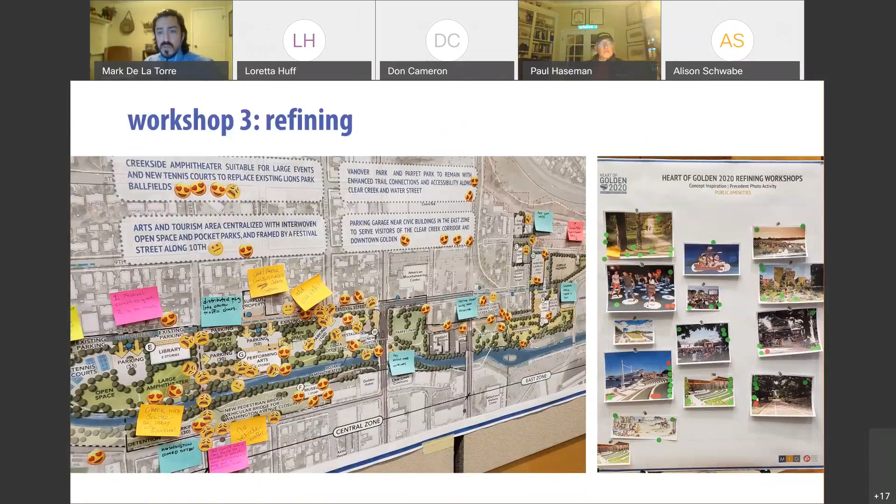Moving into next year, we had an in-person event, but we know that one single event on a given night of the week isn't going to capture everyone's input. So we replicated all those activities and hosted them online for a long period of time and got a lot more comments. We built off of those conversations and findings from the in-person event and continued that online presence for a series of weeks and months moving forward.

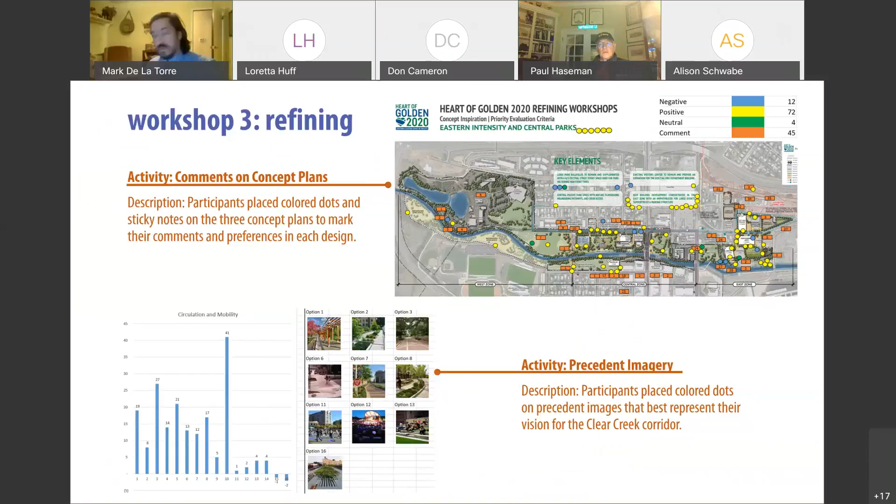From that, we moved forward with refining the input we received into a preferred conceptual direction. I'm not saying all the elements of this particular concept are the ones that rose to the top, but this generally had the elements that really resonated with the community at large.

In short, if we look at what those preferred elements were, it was really about trying to push a lot of that development intensity to the east and trying to preserve as much open space in the central core as possible. You can see a couple of zones here out east, and you can see the central and the west. That's going to be a consistent theme.

We've had a lot of great engagement events throughout the past year, some in person, some online, surveys, small groups, digital activities, all sorts of things, with a lot of different touch points with the community. But by and large, across the board, we're hearing consistent themes, which is always exciting. It makes the job easier. We're pointing in the right direction with not just civic needs, but also the community's aspirations.

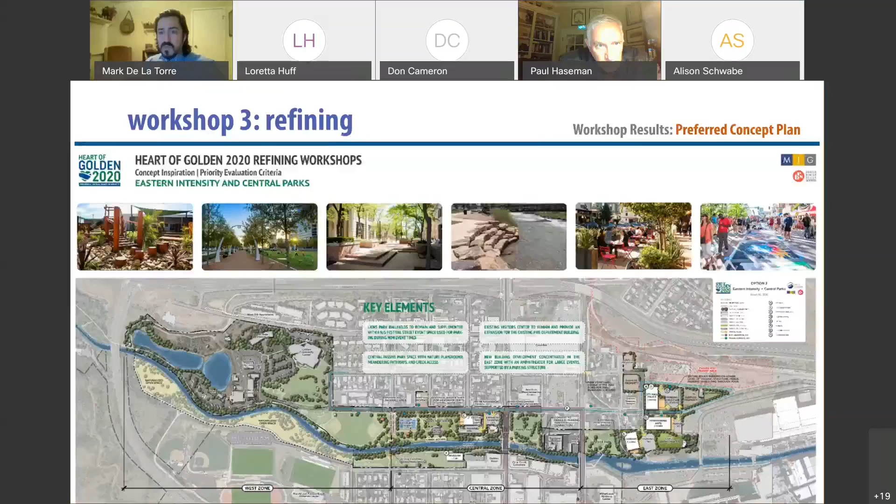With the thought of consolidating density about the east end and opening up the central space, some of the precedent images that really resonated with the community involved large open spaces, amphitheaters, passive walkways, and places to intimately gather in large groups. We want to make sure the character of these spaces really carried forward as we moved into refining what those concepts might be. So those conceptual elements are key themes.

Another one, actually more recently, we hosted a walking tour in kind of late September, early October. I say that generally because honestly, months and dates are a bit of a blur for me right now with two little ones at home.

But we had a great walking tour. There were four stations along the Clear Creek corridor at the Coors property up to the northeast and all the way down to the Illinois Street Ped Bridge. At those different stations we had informational boards, activities, and great conversations with numerous residents across Golden. That helped reaffirm some of the things we'd been hearing, but in a way that I think let us interact with more people that we hadn't seen in traditional formats like small stakeholder groups, large community meetings, or even an online platform.

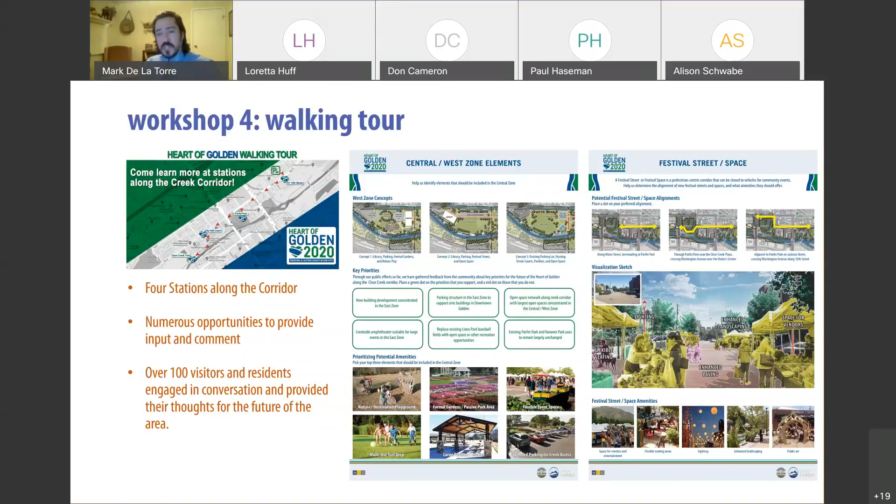So that walking tour, we took the information from there. At this point, I've mentioned a number of different strategies we deployed to try and get a general consensus, and we have data points across the board. For the sake of y'all's sanity, we won't share all those data points — it's a really, really big Excel table that we're pulling all this information together on.

But a way of building upon that is giving y'all a bit more ownership over the process. We know that as professionals, we can get into the weeds of like, oh, this building definitely belongs over on the east end and this one over here, and this is the rhyme and reason to that. But y'all know your city better than we do.

So we used some of the direction we had heard from y'all to date and started with a design-your-own-corridor piece. This was building off of the walking tour and all the engagement points we had to date, to add another touch point with the community that was unique and different from how we'd been asking questions before. Through that process, we started with some of those base concepts that originated in putting the buildings out east and giving us central space in the middle, and we took a couple of different flavors of that to start with.

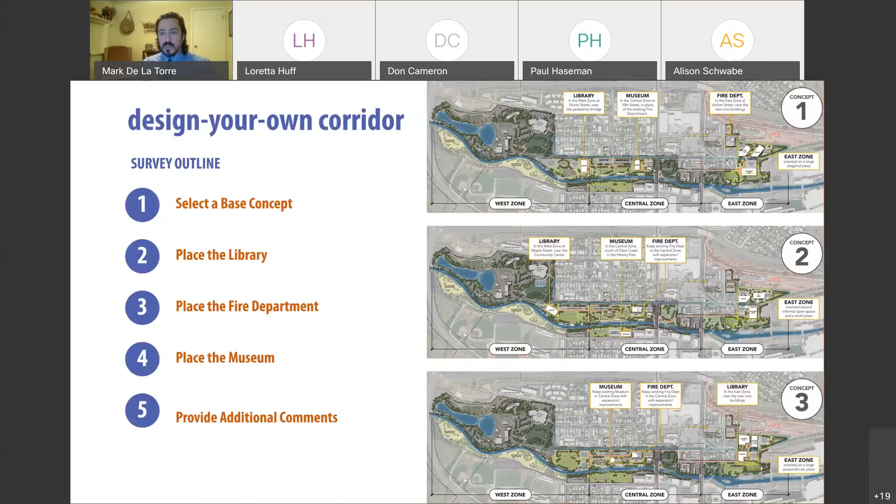Through a choose-your-own-path activity looking at key elements of the library, fire department, and museum, participants were able to build their own Clear Creek corridor concept. If you put a library in the location of the existing fire department, clearly the fire department can't go there anymore. We looked at about 45 different options of where buildings and elements could be placed.

Through that process we came to very similar conclusions, which is great. We're asking the same question in a bunch of different ways and getting more nuanced answers about using the east zone to anchor the library, possibly fire and museum as well, maybe looking at different locations for the museum across the creek.

As you went through the activity, by the end you'd populate your own illustrative plan or concept for the area. In this particular one, the one that rose to the top of all 45 different scenarios, it didn't notably score higher, but it showed the central space largely open, with the museum moved across the creek and fire down on the east end.

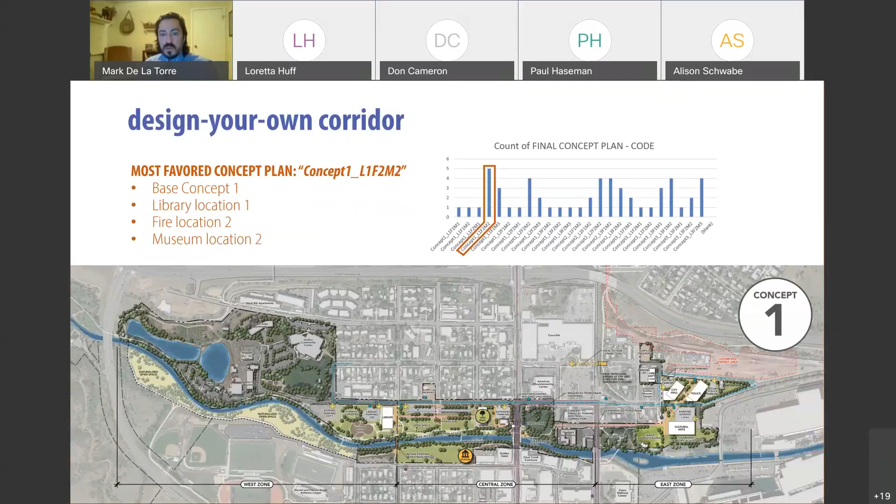That's not saying this is the definite direction moving forward, or that we're basing all our decisions off of this. But we're hearing some consistent themes about pushing things out east and figuring out how to open up that central space to respond to community needs around open space and passive uses.

Some of the larger themes touched on so far: open space is key to the central part of the Clear Creek corridor, and civic buildings and adjacent uses should be located to the east end of the larger zone we're looking at. The library is one area where we got a bit of mixed feedback.

There was pretty consistent direction for some program elements, like an amphitheater or fire department, but the library's position could go multiple ways—it could stay in its current location, join its civic buddies out east, or do a number of things. That one was a unique case, and as we move forward you'll see we still have diverging directions to consider.

Some comments during that time were really exciting—things we heard early on were integrated and carried forward with additional support, whether it was the amphitheater or using density on the east end to provide parking tied to a shuttle that relieves pressure and congestion in the central and west zones. There were consistent things that came up from community comment and anecdotally from those first community meetings.

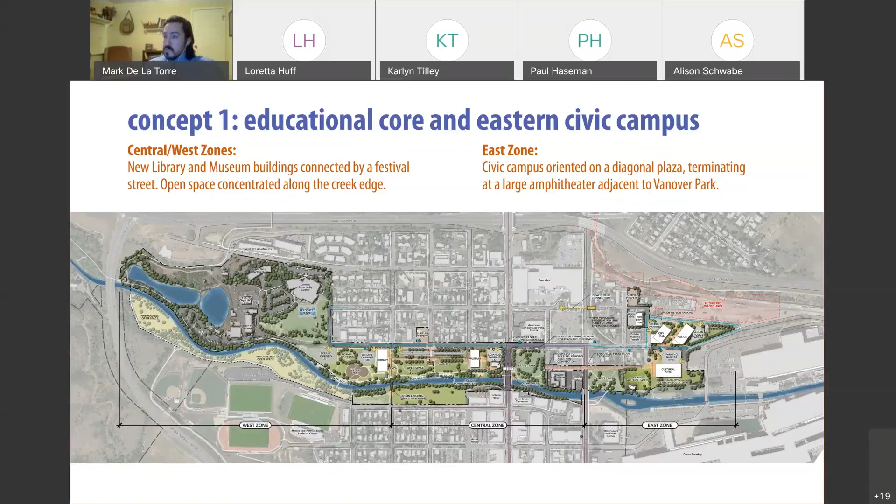The first is using that central space to highlight two culturally oriented facilities: an expanded library, Jeffco's library system there, and a museum. Those two culturally oriented community-type uses would act as bookends, from a building standpoint, to a central space that would be largely open. Across the board, this is a massive net increase in the amount of open space being provided, regardless of keeping buildings in this central space right here.

We have a consolidated and more intentional parking strategy. By pulling out some of those uses, you can see that central space -- and this is again looking at the Illinois pedestrian bridge, and back here, this little guy, is our existing visitor center.

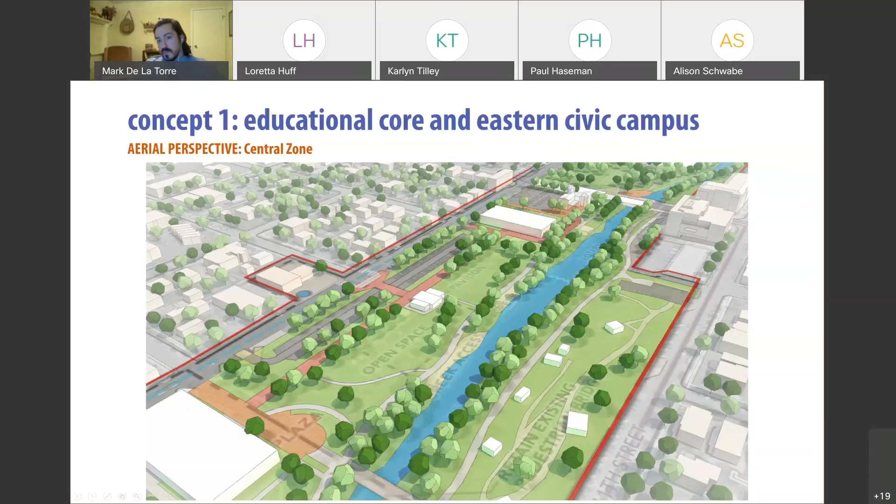When we look at the relationship that the central zone has to the west in this particular piece -- and again, I want to reiterate, I mentioned it earlier, but it's important to note that while these conceptual packages put together a conceptual design we believe is viable, it's not saying that any one of these is the right solution, either-or, one over the other. We're really focused on those elements and how they work together. I want to make sure that through this part of the process we're getting to a pause point, with some work ahead of us in the winter and early spring.

We want to make sure that all those elements still mesh well when we hopefully get to a preferred concept come next spring and summer.

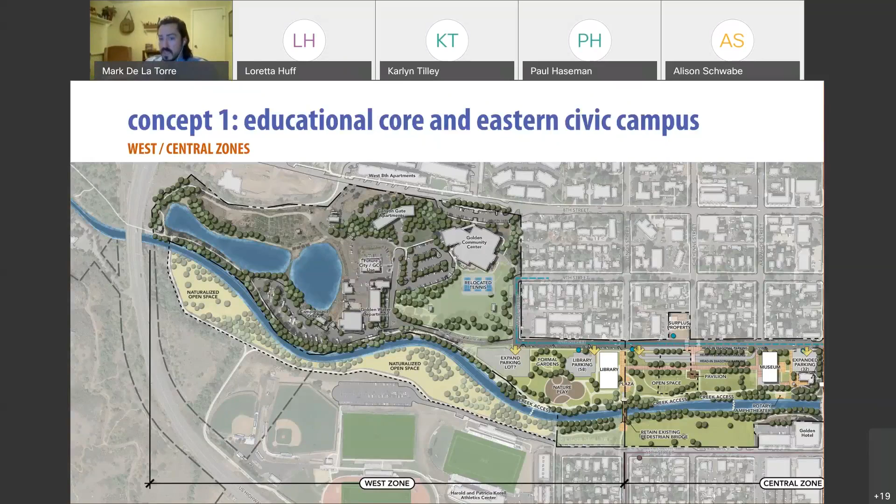On the west end here, though, you can see relocated tennis courts, the inclusion of some new program elements that we heard from the community: formal gardens, nature play, a pavilion, or more of a formal landing plaza for that Illinois Ped Bridge that has a relationship with the library itself.

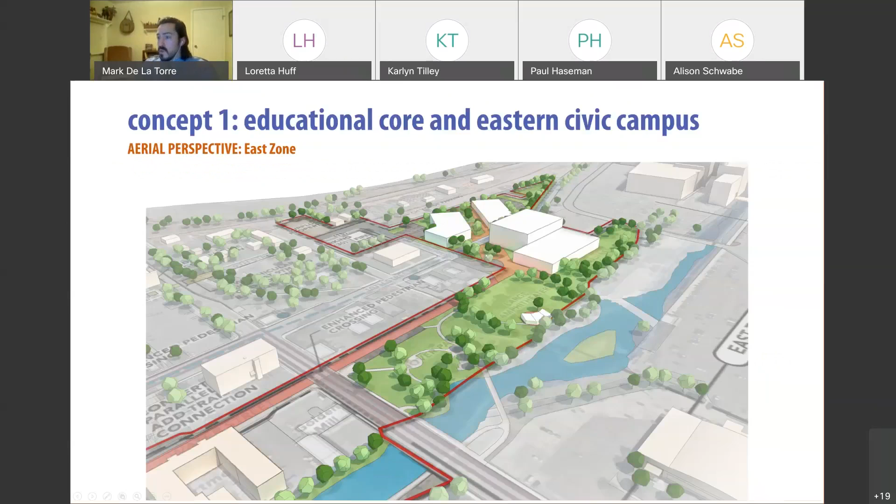Looking over to the east end, you can see that Vanover Park is now flanked by a larger amphitheater, which is on axis with kind of a view corridor that looks up to Table Mountain, with some larger civic facilities over where the Coors office building used to be located.

That orientation here, from planners speak, y'all probably heard it as well, we typically refer to as plan north in this instance. We've oriented the map more so as what we call golden north, just so we can lay things out pretty intentionally on a screen. But this axis right here, it looks like it's coming out at an angle—that's our true north angle, looking straight up to Table Mountain there.

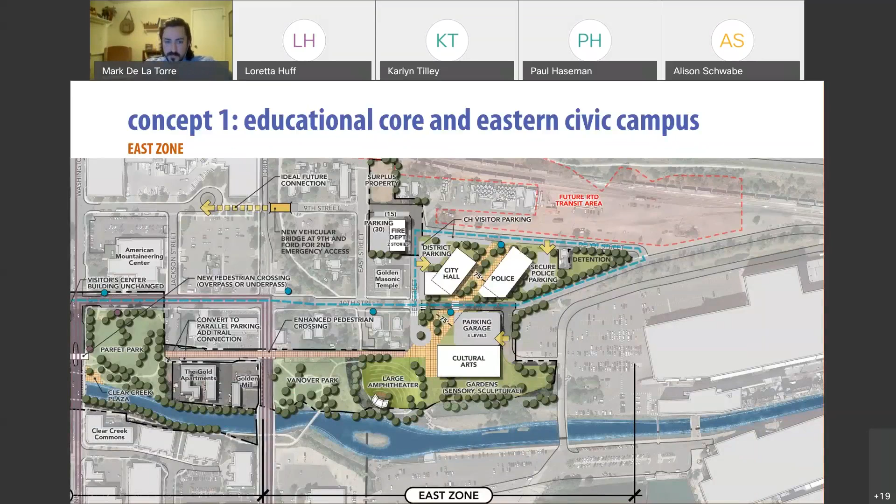The other conceptual packaging of those elements, based on the themes that we heard from the group and the community at large, is: okay, that's a good step, we like some of those cultural elements in that central zone. Library, yeah sure, it's already there. Museum, makes sense—you've moved some of those pieces out. But what if you gave us the whole corridor for just open space?

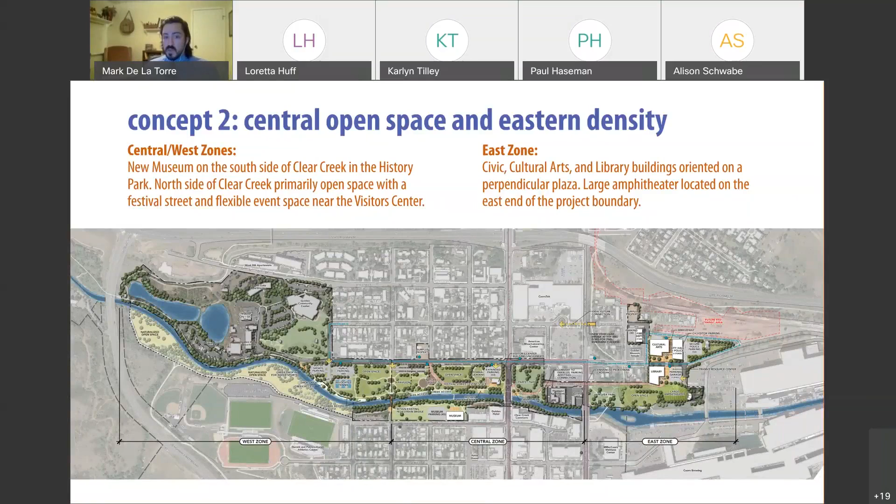So we looked at a strategy where we might be able to achieve that as well. This particular one moved the library out east and the museum across the creek to join the Clear Creek History Park. Additional study would of course be required to figure out parking and access and the preservation of some of the design intent of the layout.

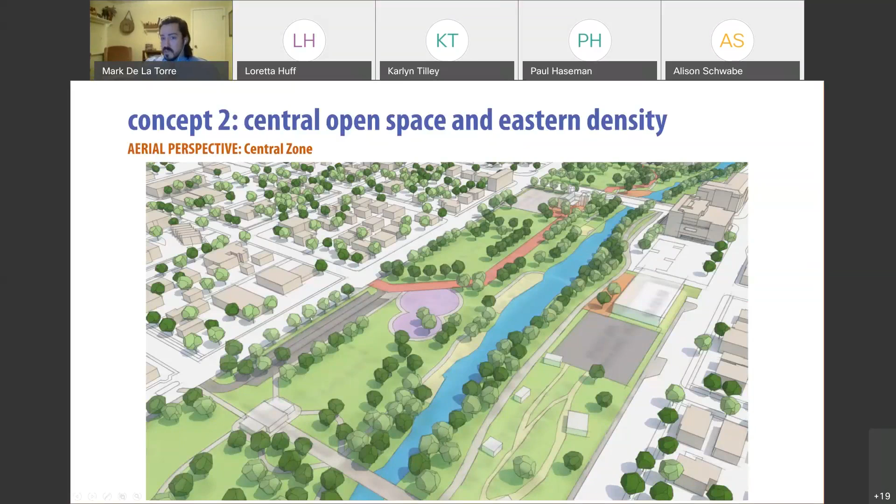Obviously some modification will need to occur, but those types of moves of relocating the library and the museum preserve, as y'all can see, the vast majority of that central zone for, as we heard from the community, open space—nature play elements, open space, maybe some of those recreational facilities redone.

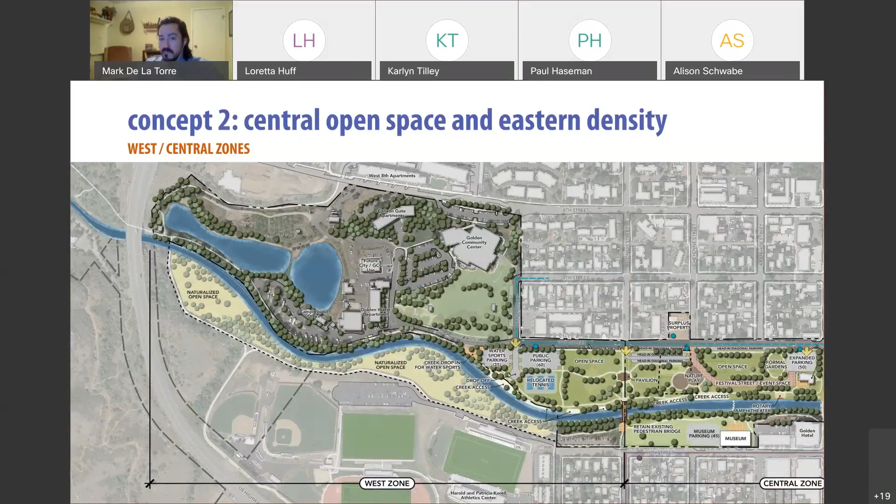In this particular instance here, you can see the ball fields have been relocated. That's not to say that that necessarily needs to occur, because this is devoted all to open space. There certainly could be a variation moving forward with the ball fields, or part of one, or a new one relocated or maintained in this kind of central zone right here.

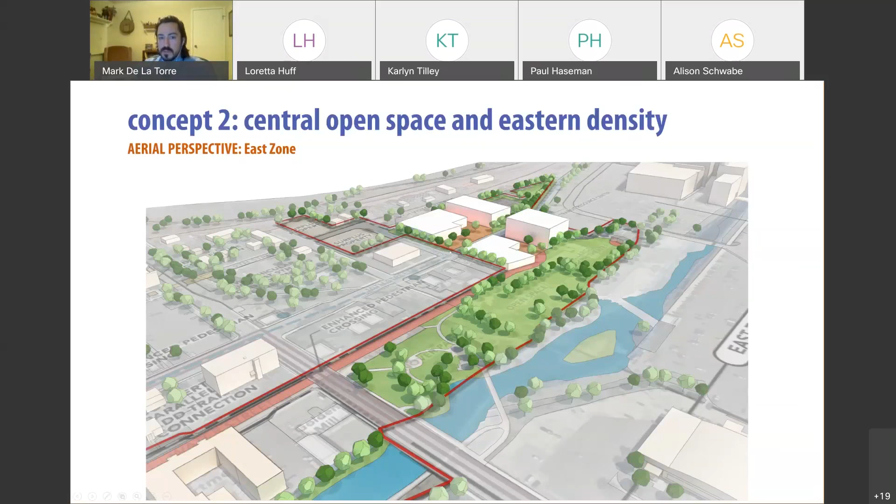When we look out to the east end now—pardon me, take a sip of water—you can see a little more of a tight-knit organization of larger buildings around this kind of entry point from 10th, as you're coming in off of 44th, as you wrap into kind of the downtown area there.

So as you come through, we have a combined city hall and police facility there, kind of as your flagship building at the corner. A larger parking facility that serves the needs of not just these particular uses—cultural arts, library, city hall, and police—but also, as you can see with the blue line there...

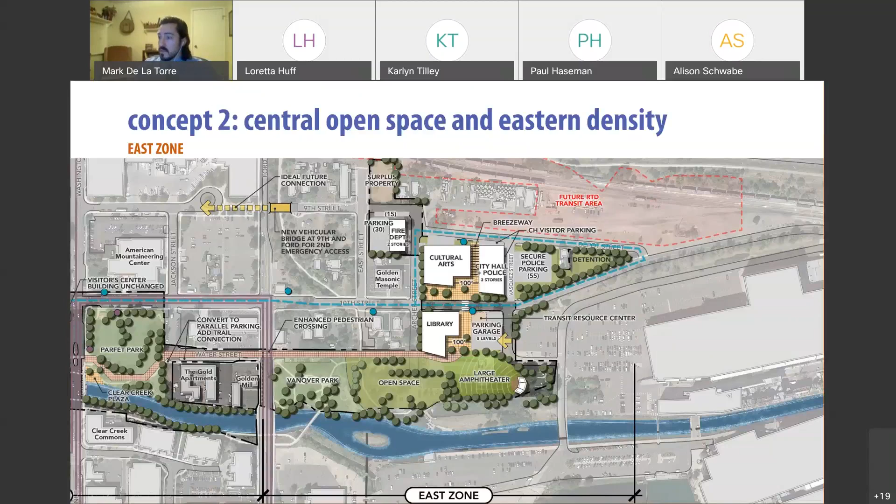...which is analogous with the blue line you'll have seen on the previous illustration, a potential shuttle alignment to try and relieve some of the parking pressure, the traffic congestion, those types of things that we've heard from adjacent neighbors, like, hey, that's not great, let's figure out a way to solve this—trying to relieve some of that by intentionally consolidating some of that vehicular traffic over on the east end.

That there is kind of a brief summary of a lot of work that's been done over a year. Again, I didn't want to rattle through charts and tables—I wanted to make sure we got the highlights of that there.

And it's important to note that the Design Your Own Corridor survey, for example, you might say, hey Mark, I noticed there's only about 50, 60 people that responded to that—that's not enough to make a decision off of. And that's a fair argument.

If that were the only way we'd reach out to the community, I would have the same reservations. But as this has been part of a very robust engagement campaign of talking to everyone who's willing to listen, and some people who don't want to still ask questions anyways, I think that became almost a way of verifying that the themes we heard in every other type of conversation are not dissimilar from what we heard in the build your own kind of corridor thing.

So that we thought was a nice validation of what we've been hearing, the questions we've been asking, and the info and data we're receiving was kind of on par with that. With that said, I'm going to hand it over to Karlyn, mostly to give myself a chance to breathe. I do apologize, you all were very patient with me.

Very excited to answer questions, go back to different slides and look at anything in greater detail. The takeaway, if you took nothing else away, is that we've taken a lot of information in. We're excited about the themes that have come out, the community is driven around centralized open space and putting buildings as far out east as we can. We think the packaging of some of those concept elements puts us in a good position to ask more specific and detailed questions with specialists and different program users, whether it's libraries or the police, to drill down into what those things might be to make these potential concepts come to reality as we move forward.